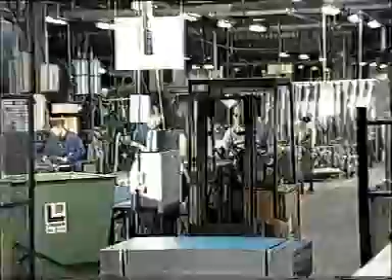Gilbert's Blackpool Limited is one of the UK's leading designers and manufacturers of grills, diffusers, louvers and smoke and fire dampers for the heating, ventilating and air conditioning industry. In recent years, the company has firmly positioned itself as one of the top 3 UK air terminal device manufacturers.

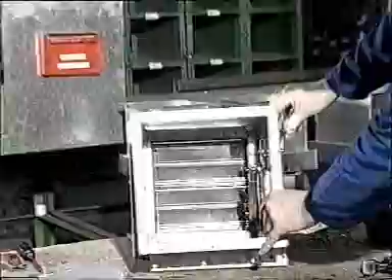Privately owned by chairman Gilbert Haslam, the company was originally established in 1961 and in its 38 years of industry experience has evolved from its origins as a manufacturer of domestic warm air heating grills to its present-day status.

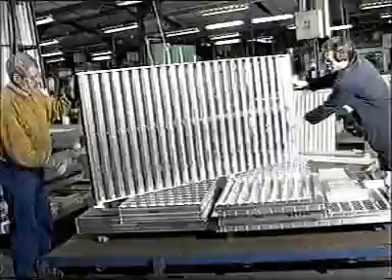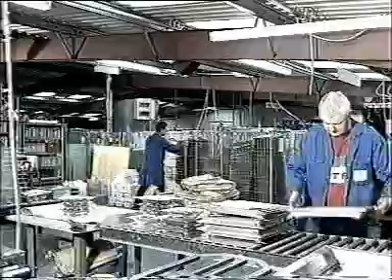Over the years, the company has built its reputation for providing an extensive range of attractively styled and well-engineered products at competitive prices. With comprehensive internal and external technical sales support, Gilberts are able to provide high standards of customer service, responding quickly and efficiently to the many and varied demands of the building services industry.

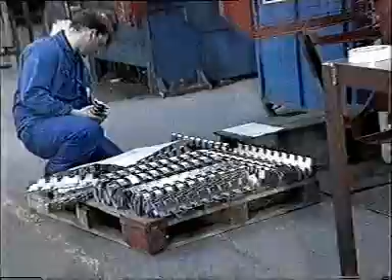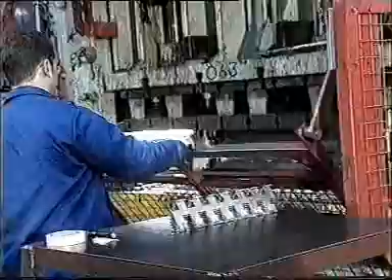Employing around 250 personnel across 2 manufacturing plants, Gilberts have a multifunctional labour resource and a wide cross-breadth of relevant product experience to provide the flexibility necessary in today's fast-track working environment.

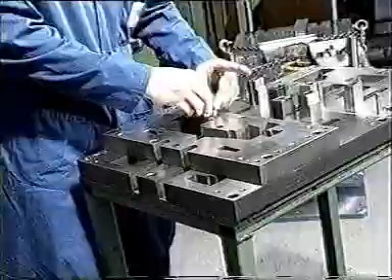Gilbert's in-house tooling and engineering division design and fabricate all types of special purpose machines, press tools, jigs and fixtures, both for external clients and for in-house use.

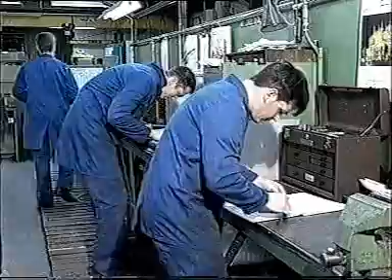This vital resource enables Gilberts to maintain quality standards, provide a rapid response to market and product changes, and lends itself well to satisfying special designs and product requirements.

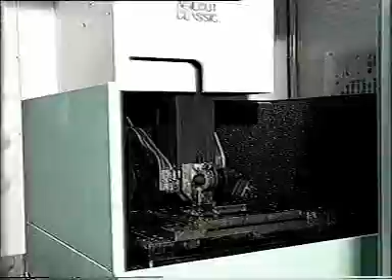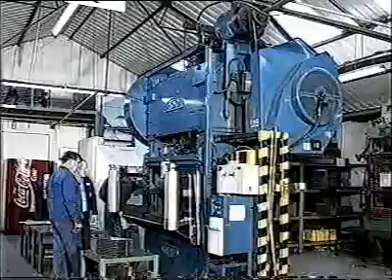The pressing division manufactures most of the piece parts for the specific product centres, again adding flexibility, control and speed to lead times. Within this sector, Gilberts have considerable CNC punch press capacity, ideally suited to low-cost production of specials and short production runs.

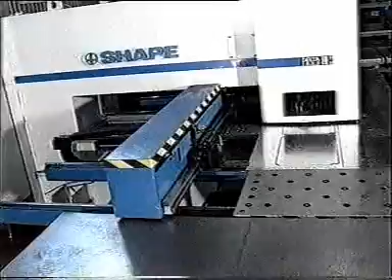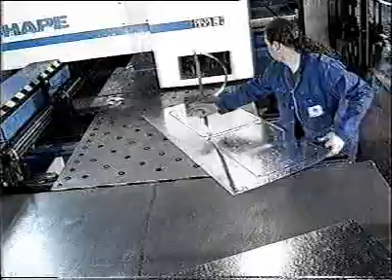These provide a unique capability to experiment with prototypes and specials both for new product development and for specific projects.

The Cleveleys production unit houses a fully staffed research and development and air movement test facility.

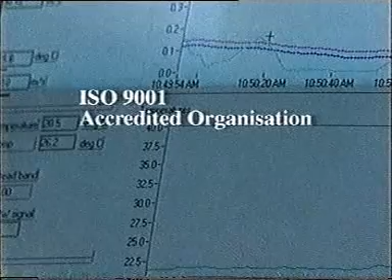The centre serves the purpose of enabling ongoing product performance and research tests to be made to satisfy quality assurance regulations. Gilberts are an ISO 9001 accredited organisation and undertakes special tests to customer requirements.

Operations within the facility entail critical examinations of the performance and air movement characteristics of the product under various types of input and environmental conditions.

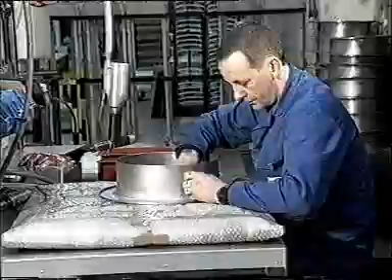Considerable time has been spent at this facility developing the latest full range of high-induction swirl air distribution equipment designed to meet the most demanding of applications.

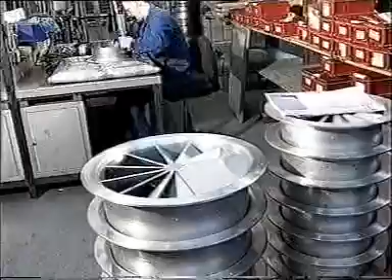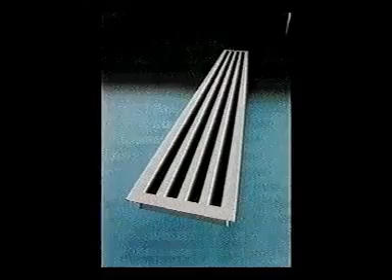Diffusers have been developed to cater for both ceiling, floor and side wall supply, and the following footage of specific tests should assist further in understanding the individual units that combine to provide this unique range of air distribution devices.

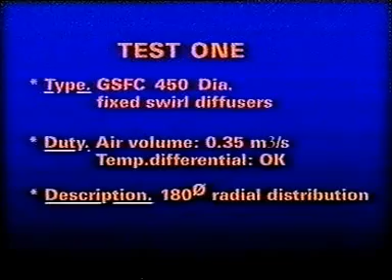Test 1. This demonstration of a perforated face swirl diffuser clearly shows the high volume of air it's possible to supply through this type of diffuser, whilst also maintaining both a low throw and a high entrainment ratio of supply air to room air. Quick dissipation throughout the test space can clearly be seen.

Test 2. In order to cater for the changes in heating and cooling applications, this test demonstrates the almost instant response that can be achieved by using an adjustable swirl diffuser.

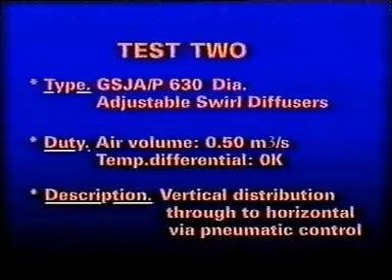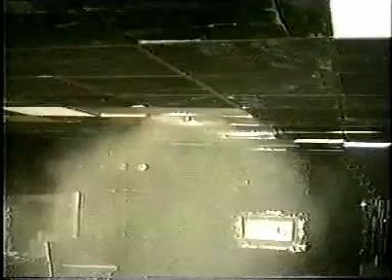Although in this test the unit was pneumatically controlled, a similar response is possible using electrically motorized control. Alternatively, a more gradual action and response time can be achieved using a thermally controlled device.

Vertical to horizontal air distribution is therefore available depending upon air discharge temperatures. A high room air mixing rate is also readily apparent.

Test 3. As described in the previous test, swirl diffusers are suitable for both vertical and horizontal distribution. This test further illustrates the capacity of the device when used in a vertical heating mode.

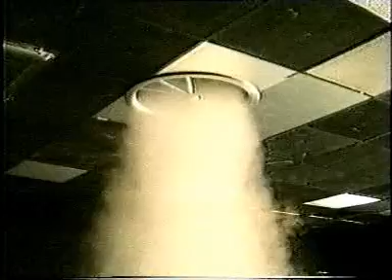Note, the swirling action of the supply jet is still maintained in the vertical distribution mode.

Test 4. This test illustrates a similar adjustable swirl diffuser to the previous test, but now following a horizontal air pattern under cooling conditions.

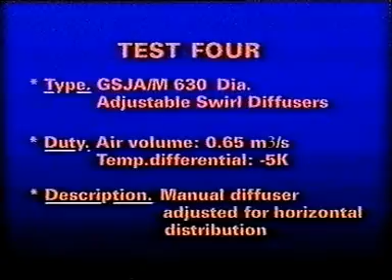Again, the efficient mixing of the supply to room air can be seen, a key feature which enables high air change rates to be achieved.

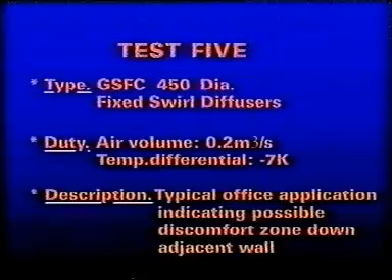Test 5. This and the following test highlight the effectiveness of blanking on the perforated swirl diffuser range. This test shows the problems that can be encountered if units are positioned too close to walls or barriers, and demonstrates the downward air currents over these structures.

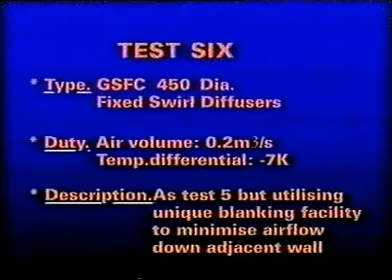Test 6. In this test, the previous diffuser has been effectively blanked in one direction to alleviate the downward air current over the near wall, and therefore avoid high velocities throughout the occupied zone.

By using the perforated face swirl type of diffuser, any blanking of the device is hidden, and therefore a similar appearance of all diffusers in one space can be maintained.

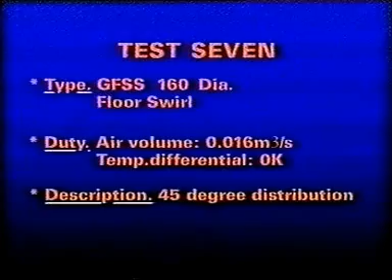Test 7. The following three test examples illustrate the versatility of the series GFSS floor-mounted high-induction swirl diffuser. This particular test illustrates the general swirl action under isothermal conditions and shows the high mixing effect possible with this type of device.

Test 8. During this test, the swirl diffuser has been viewed along the horizontal axis in order to give a clear indication of the horizontal distribution effect during a cooling differential of 5 degrees centigrade.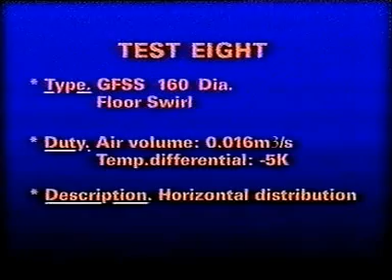Since the unit develops high entrainment of room to supply air, close positioning of the devices is possible whilst maintaining comfortable conditions throughout the occupied zone.

The supply air also spreads rapidly to produce a displacement flow principle throughout the space. Fresh air is therefore provided close to the occupants, with the units having been tested to offset heating loads of up to 100 watts per square meter.

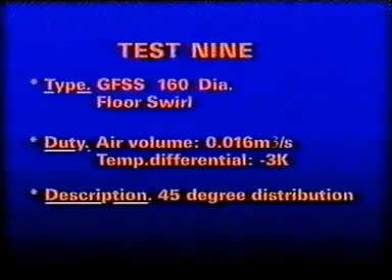Test 9. This test clearly illustrates flexibility of the floor swirl diffuser. By positional adjustment of the swirl impeller, the discharge angle of the airstream can be altered, and in this particular test has been set up to provide a discharge angle of 45 degrees.

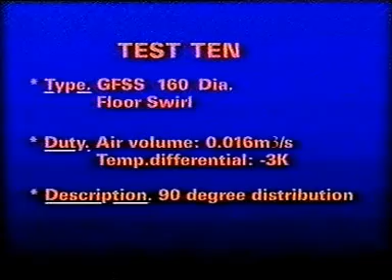Test 10. This test demonstrates a further adjustment of the floor swirl impeller in order to achieve a full vertical air supply. Supply air under these conditions is shown to fall back to a lower level.

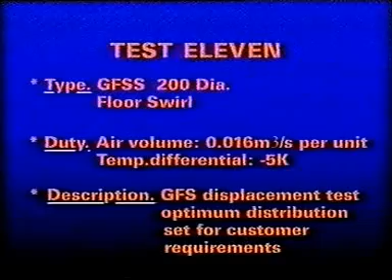Test 11. This is a general test with a number of 200 diameter floor swirl units set for vertical discharge. General migration of the supply air can be seen with the various heating devices having a definite effect.

Test 12. This brief test illustrates the basic radial air discharge characteristics of the GZL series linear high induction diffuser. The pattern of the discharge jets can be seen to dissipate in all directions with very limited throws and low terminal velocities.

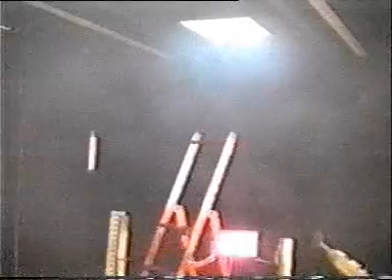Test 13. These series of tests were set up to demonstrate the amount of air changes that can be accommodated in a typical conditioned space using the new ZipAir linear diffuser. Three rows of single slot units in this test gave an air change rate of approximately 29, whilst maintaining an acceptable velocity level in the occupied zone.

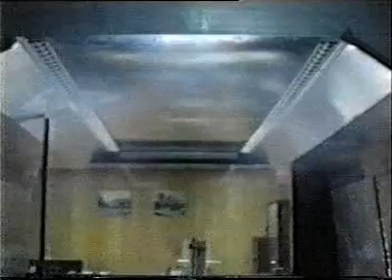Test 14. This test demonstrates the flexibility of the ZipAir diffuser in a confined space. Individual smoke traces illustrate that the discharge velocities quickly decay to an acceptable limit.

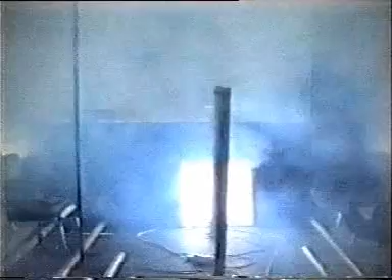Each of these tests have been designed to show how Gilbert's air distribution equipment can be utilized for a wide variety of applications and environments.

With increasing demand to achieve effective air movement in the most unusual environments, our team of skilled designers and engineers will continue to develop even more sophisticated solutions in order to meet those challenges.